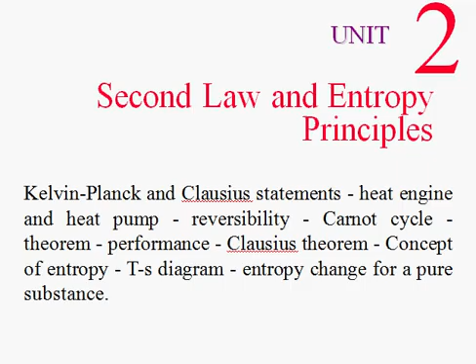Limitation of first law. First law of thermodynamics, law of conservation of energy, states that energy cannot be created or destroyed. In first law of thermodynamics, heat and work are mutually interconvertible. That is a limitation in first law. There is no specification of the direction of flow of heat and work. So whether heat flows from hot body to cold body or cold body to hot body is

not clearly mentioned. For example, take a coffee at a temperature of 70 degrees Celsius to the surrounding of the system. Heat flow from one place to another place is not mentioned. Either it may be hot body to cold body or cold body to hot body. But practically the heat will be transferred from the hot body, the coffee at 70 degrees Celsius, to the surrounding, which is a cold body. So it's not clearly mentioned in first law of thermodynamics.

Then second limitation, both heat and work are mutually interconvertible. It is impossible to construct such a system because heat cannot be fully converted into mechanical work due to various reasons. It may be friction, like that.

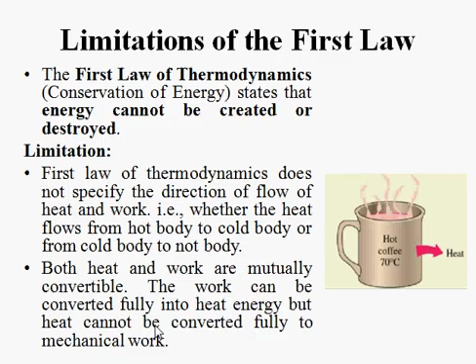Kelvin Planck statement. To overcome the limitations of first law of thermodynamics, the second law of thermodynamics is introduced. In that case, two statements are declared. First one, Kelvin Planck statement. Second one, Clausius statement. In Kelvin Planck statement, it is impossible to construct an engine working on a cyclic process which converts the entire heat energy supplied into an equal amount of useful work.

So as per the statement of first law, heat energy given to the system, that is the heat engine, will be fully converted into work. That means if heat supplied is 100 kilojoules, work done is also 100 kilojoules as per the first law of thermodynamics. It is impossible to construct. So some losses are there.

For example, in this diagram, heat supplied is 100 kilojoules to the heat engine. It gives some work output of 40 kilojoules. The remaining is heat rejected, 60 kilojoules to the sink. This is possible. This states the Kelvin Planck statement.

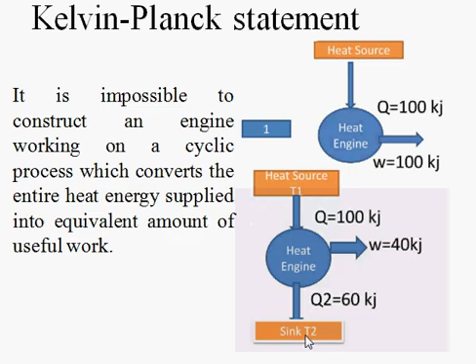Next one, Clausius statement. It states that heat cannot flow from cold reservoir to hot reservoir without any external aid. From this diagram, this is the cold sink. So heat will transfer from the cold sink to the hot side, that is the heat source. It is impossible without any external devices. It is possible when an external device is used, heat pump or refrigerator, like that.

Okay. So in figure 2, from the heat sink, heat extracted is 60 kilojoules, which is supplied to the heat pump. The heat pump has some work input, then it will be processed, then 100 kilojoules of heat output will be delivered to the source.

So the heat pump is a device which is used to maintain a higher temperature than the surrounding. Similarly, that device may be a refrigerator, which maintains the temperature lower than the surrounding. So that is the difference between the heat pump and a refrigerator. It's also stated in the Clausius statement.

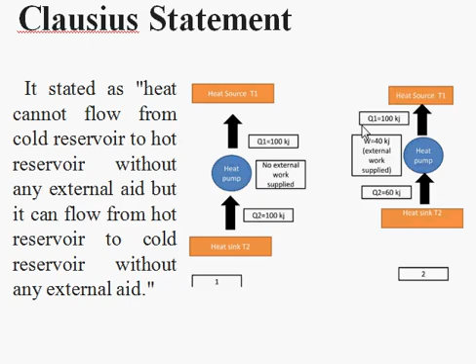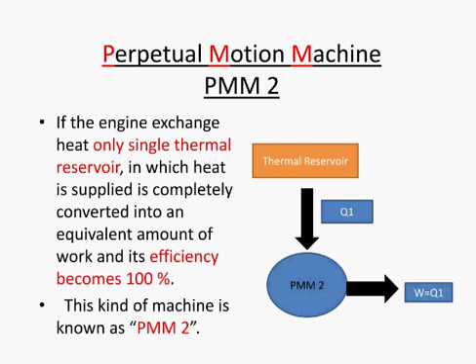Perpetual motion machine 2, PMM2. If the engine exchanges heat only with a single thermal reservoir, in which the heat supplied is completely converted into an equivalent amount of work, its efficiency becomes 100%, which is impossible. That kind of machine we call a perpetual motion machine 2.

Reversible process and irreversibility. A reversible process is one that can be executed in the reverse direction with no net change in system or surroundings. At the end of the forward or backward reversible process, both system and surroundings are returned to their initial states. Practically, no processes are reversible. However, reversible processes are theoretically the most efficient processes.

All real processes are irreversible due to irreversibilities. The various reasons for irreversibility: first reason is friction. Second one, sudden expansion and compression. Then heat transfer between bodies with a finite temperature difference. These are all reasons for irreversibility. Practically all processes are irreversible processes.

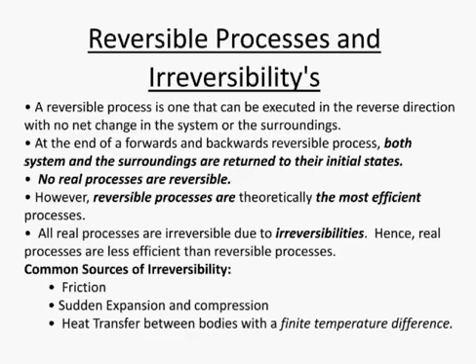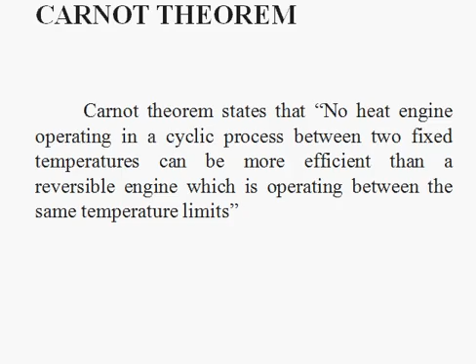Next one, Carnot theorem. Carnot theorem states that no heat engine operating in a cyclic process between two fixed temperatures can be more efficient than a reversible engine operating between the same temperature limits. Carnot cycle's efficiency gives the maximum efficiency. The Carnot cycle and the Carnot engine we discussed here.

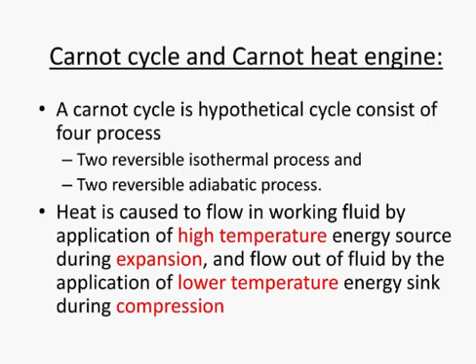A Carnot cycle is a hypothetical cycle consisting of four processes: two reversible isothermal processes and two reversible adiabatic processes. In the isothermal processes, heat addition and heat rejection take place. In the adiabatic processes, compression and expansion take place.

Assumptions made in the Carnot cycle. The piston moving in the cylinder does not produce any friction, but practically all engines have friction. Second point, the cylinder head is arranged in such a way that it can be a perfect heat conductor or heat insulator. But in this case, there is no heat loss in the system. Third point, the walls of the cylinder and piston are considered perfect insulators of heat.

Again the same point. Then heat transfer does not affect the temperature of the source or sink reservoir; it does not affect the temperature limits, the higher and lower temperatures. Fifth point, compression and expansion processes are reversible, but practically all processes are irreversible. The working medium is a perfect gas with constant specific heat. Air is considered a perfect gas in this cycle.

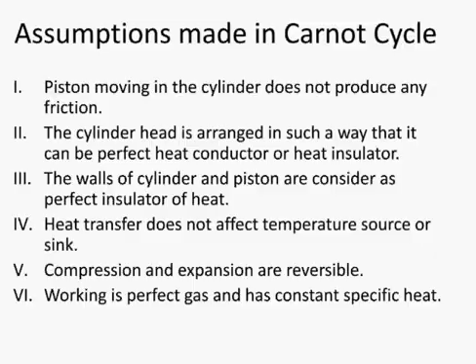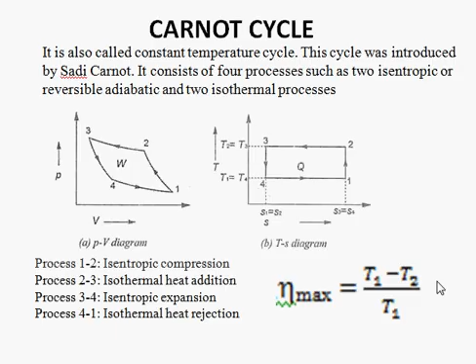Concept of entropy. Entropy is an index of unavailability or degradation of energy. By this formula, change in entropy equals heat transfer divided by absolute temperature, dQ divided by T. Del S is the change in entropy of the system. Q is the heat change of the system. T is the absolute temperature of the system.